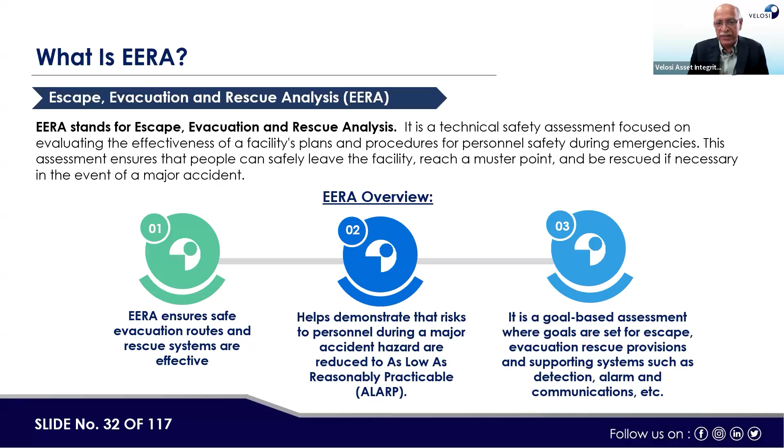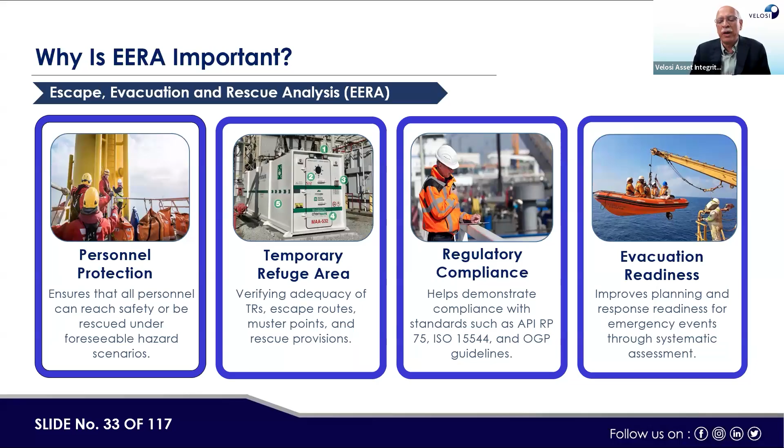Then it is also a regulatory requirement; we have to have a safe EERA situation. And there are standards like international standards, OGP standards, API standards, and companies' own standards. Then one part which is very important is evacuation readiness. You can see that if there is, let's say, a fire or some emergency on any offshore platform, there are escape boats where people can sit and be moved away from the platforms.

Now, if we see how the requirement of EERA evolved over the years, there was one major accident in the North Sea in 1988. There were many factors which contributed to this accident, but we are trying to highlight the factors related to EERA. We are not discussing all the causes of this accident because there were multiple causes. But the contributing factors related to EERA: one was inadequate rescue readiness and delayed external rescue operation. This was one of the causes.

The second one, the limited and poorly maintained escape routes resulted in many casualties. Then the third one was communication breakdowns between the different teams and shifts, which contributed to the escalation. So these were 3 reasons which contributed heavily to the increasing number of fatalities. So for EERA, especially from a communication point of view, or accessible routes during emergency, and if external involvement was required, it should have been done in a timely manner.

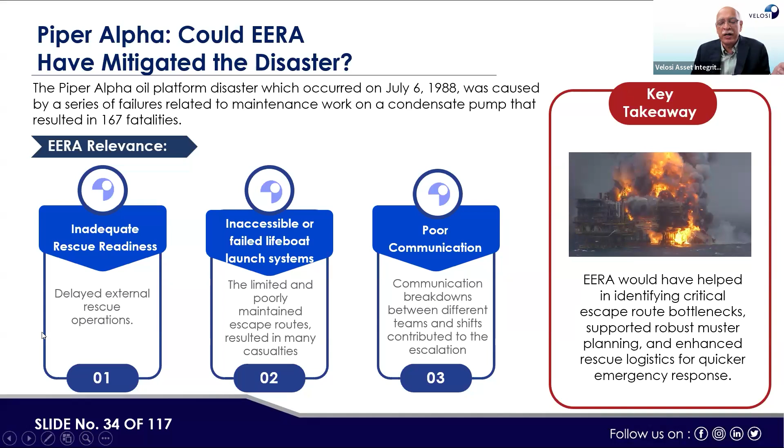There is another incident, the Kielland disaster, which happened on March 27, 1980. The Alexander L. Kielland accommodation platform capsized in the North Sea due to a structural failure, resulting in 123 fatalities. The causes of the incident were various, but the increased number of fatalities was also contributed by inadequate rescue readiness, lifeboat launch failure, and escape route inaccessibility. So these 3 reasons were also contributing towards the 123 fatalities in the North Sea.

If we go to another one, the 2010 Tesoro Anacortes refinery disaster. Here, there were 7 fatalities, which were caused by no defined escape routes, delayed rescue, and insufficient muster and refuge areas. So here, you can see the role of EERA becoming more and more important when we see the number of casualties which could occur due to any major accident.

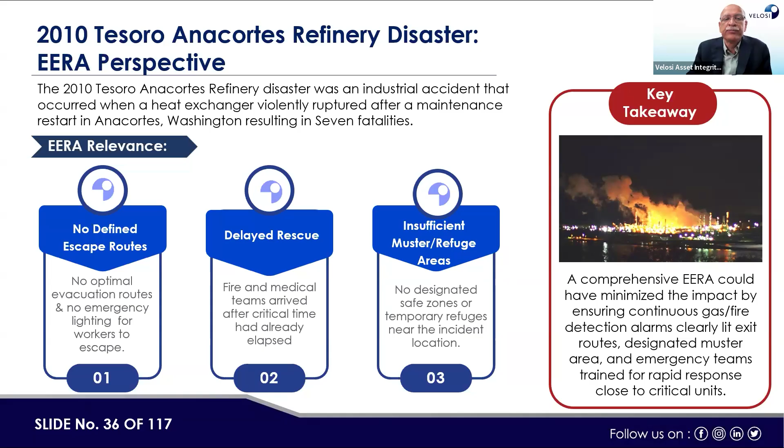So just to check our readiness, because all of you are attending this meeting and some might be getting bored with a lot of technical discussion, let's check ourselves: what is the primary objective of EERA? You can answer this question in the chat box, and then I will also show the answer. To test the response time of rescue helicopters, to monitor regular worker movement patterns, to assess the functionality of escape and rescue systems during emergencies, or to reduce the training time.

So what is the answer? Please write in the question and answer window. Some people are writing. At least I found one wrong, mostly right. So the answer is C, to assess the functionality of escape and rescue systems during emergencies.

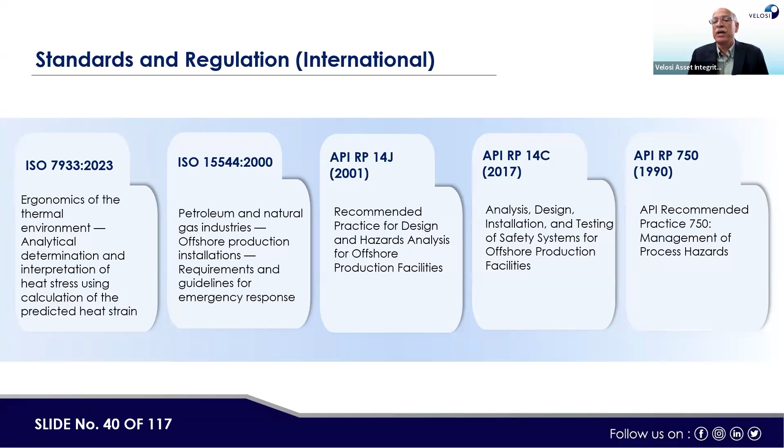One is ISO 7933, ISO 15544, API RP 14J, API RP 14C, API RP 750. If we go to the standards, this is the ergonomics of the thermal environment, analytical determination and interpretation of heat stress, calculation of the predicted heat strain.

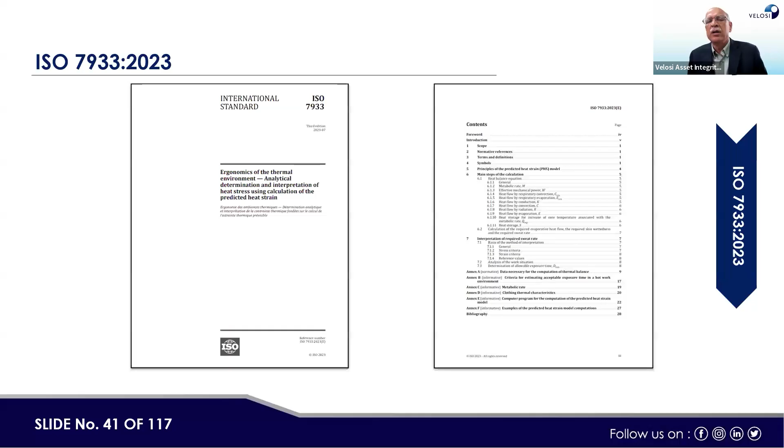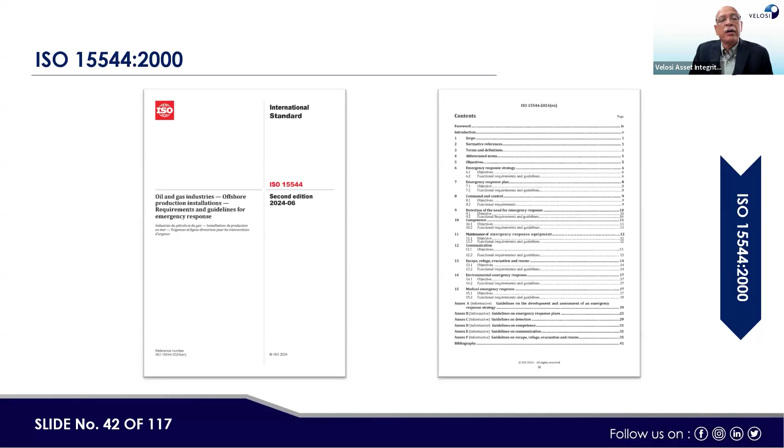This is one aspect. And the other one is a little more relevant: oil and gas industry, offshore production installations, requirements and guidelines for emergency response. This should be the first standard as a reference. Then there is a recommended practice for design and hazard analysis of offshore production facilities. This is another standard.

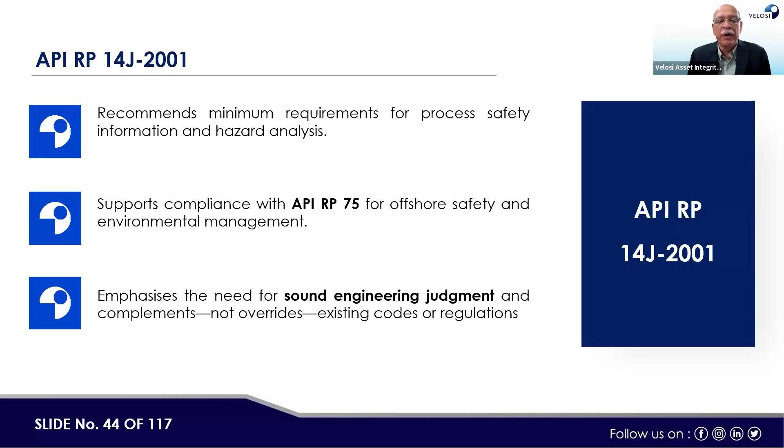The requirements covered under API 14J, if I may say, recommend minimum requirements for process safety information and hazard analysis, support compliance with API RP 75 for offshore safety and environmental management, emphasize the need for sound engineering judgment, and complement, not override, existing codes and regulations.

Next standard, API 14C, is the analysis, design, installation, and testing of safety systems for offshore production facilities. It forms the foundation of functional safety design for offshore facilities, outlines procedures for design, installation, and testing of both process safety and non-marine emergency support systems, ESS, on offshore production platforms, and coordinates with API 17V for subsea systems.

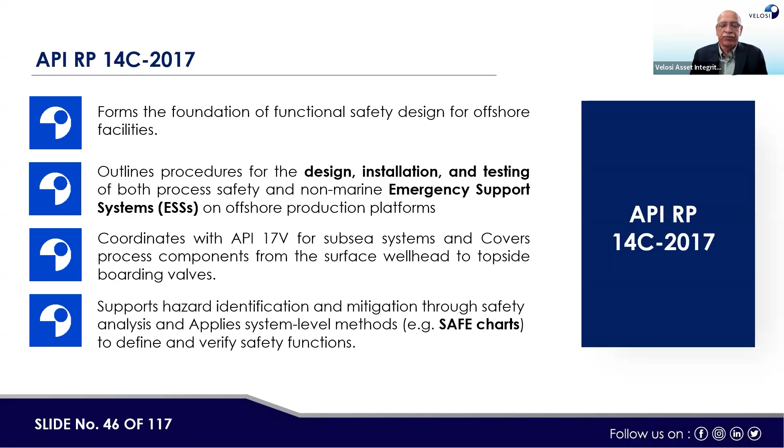It covers process components from the surface wellhead to topside boarding valves. Then it supports hazard identification and mitigation through safety analysis and applies system-level methods. Next standard, API 750, is the management of process hazards.

So there is ADNOC, a full set of standards, which we take as guidance and as basic rules. In ADNOC, for all facilities, it is a mandatory requirement for all new projects that the full set of HSE-IA related studies is produced. It has to be approved by the ADNOC regulatory system, which is the headquarters of ADNOC.

It is one of the exemplary systems in the region, from what we see, because we don't find this kind of robust system being used either by Saudi Aramco or Qatar Petroleum or other operating organizations in the area. But now we see that a lot of lessons learned from ADNOC are being adopted by the other organizations. So we feel very obliged to be working with ADNOC on these standards.

So HSE-RM-ST07 is the ERA-related standard. Then HSE-RM-ST06 is related to COMAH, which is the controlling standard. Then HSE-RM-ST03 is related to OHID. ST09 is related to FERA. And ST10 is related to the QRA requirement. It is a whole set of standards, and these are only the main standards we are trying to show here.

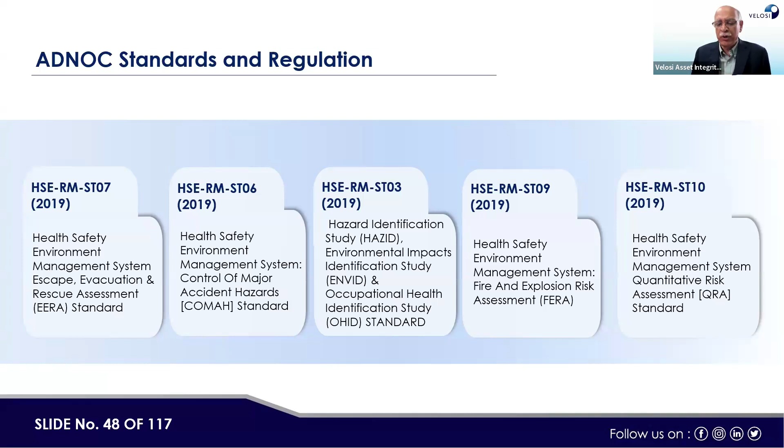This is the escape, evacuation and rescue assessment, EERA standard. It defines all requirements, all steps, workshop requirements, evaluation and a goal-based approach. Then the governing standard is COMAH, control of major accident hazards. It defines all the requirements from hazard workshop to bow tie workshop, then QRA, FERA, BRA, and then this study.

Then there is the hazard workshop standard, which covers HAZID, ENVID, and OHID. It defines the requirements of the various workshops, what the objective should be, and the worksheets of the workshops. FERA, just like QRA and BRA, is one of three quantitative risk assessment studies. This is the fire and explosion risk assessment study, and ST09 is the reference code. Then QRA, similar to FERA, but focused on quantitative risk assessment.

So now we move towards the ERA case study, because today our slides are not many. We will have a question and answer session at the end of the case study.

The project we are presenting involved HAZID, ENVID, OHID workshops and reports, bow tie workshop and reports, HSECES register and performance standards, update of the integrated QRA, fire and explosion risk assessment, FERA, emergency system survivability assessment, ESSA, escape, evacuation and rescue assessment, EERA, toxic gas dispersion modeling, COMAH report, review of the existing company HSEMS, EIA report including PPC, OHRA, and the HSEIA dossier. So you can see that ERA is part of this deliverable.

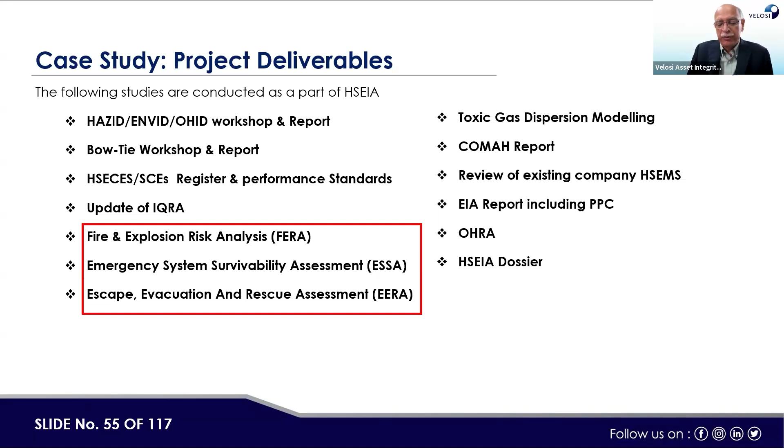Now, if we try to see as a part of the normal HSEIA protocol, which is adopted by ADNOC, here data collection, then we have OHID, ENVID, HAZID workshop, HSEIA workshop and reports. Then there is a hazard classification, non-MAH and MAH.

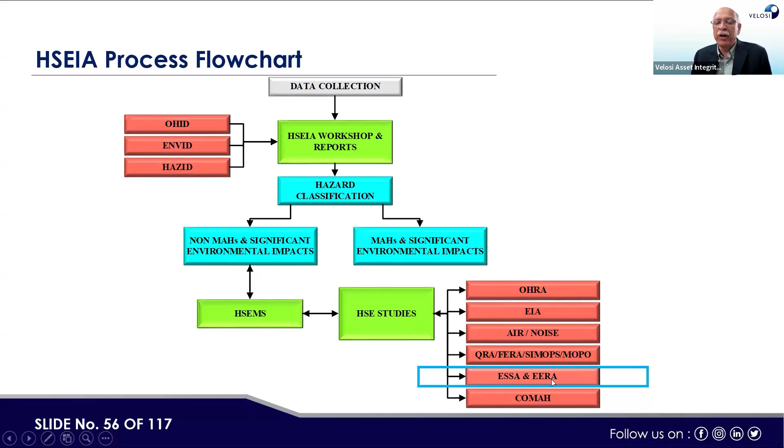Whereas non-MAH we cover through HSE-MS, and for MAH there are further set of studies which are required to be executed, including OHRA, EIA, air noise modeling, QRA, FERA, SIMOP and MOPO, ESSA and EERA, and COMAH report and HSEIA complete dossier.

So these reports also cover, if you say major accidental hazard, same detail is further provided, like QRA study report, FERA study report, ESSA study report, ERA study report, H2S zoning, along with that HSECES register at FEED stage, detail engineering stage, operation phase, and then HSE critical activity register, and then ALARP demonstration also there, risk reduction measures, cost benefit analysis, and emergency and facility response plan, which is practically correlated with ERA.

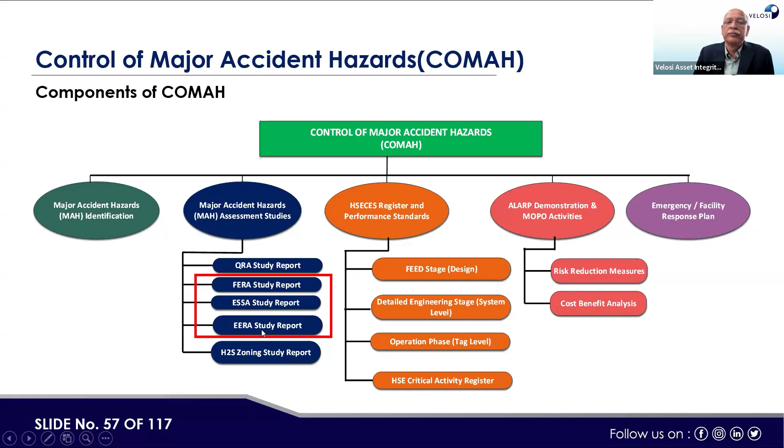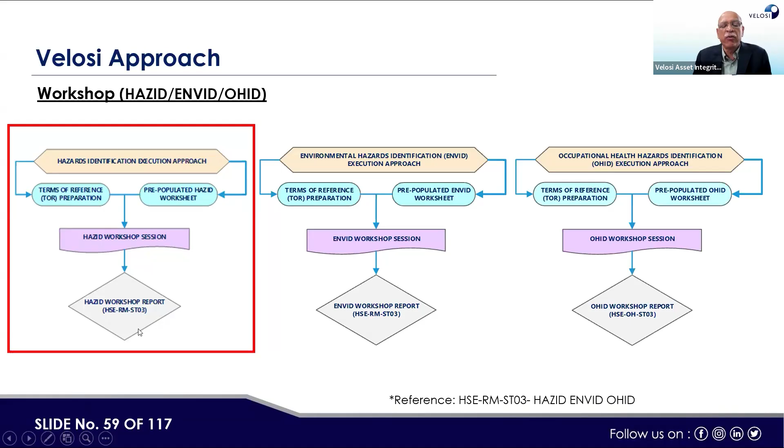Our approach, we first carry out the ERA; we don't do it as one of the parts. It can be done even, but we try to cover from A to Z aspects. First, there are 3 workshops like HAZID, ENVID, and OHID. Under HAZID, we covered hazards identification, and then terms of references are issued, workshop is executed, and then under workshop sessions, we try to identify the hazards in accordance with ST03 standard.

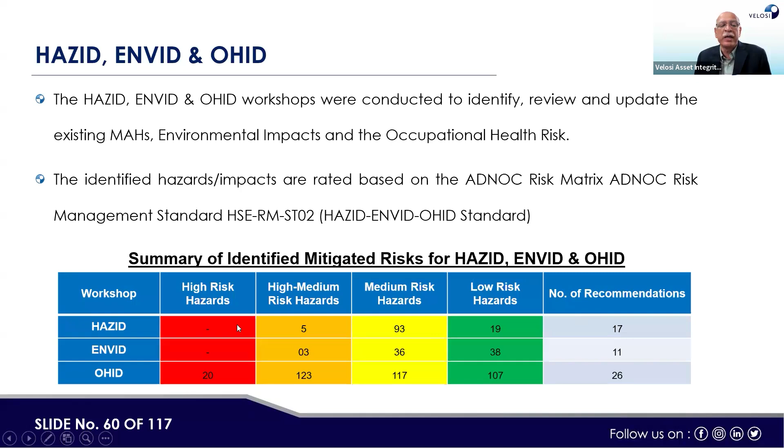In this particular project, we have identified various kinds of hazards, like high risk hazards under HAZID none, but OHID 20, and high and medium risk hazards under HAZID 5, under ENVID 03, OHID 123, medium risk hazards like 93 under HAZID, and under ENVID 36, OHID 117. Then low risk hazards are also there, and number of recommendations, sorry, 17, 11, and 26 against HAZID were 17.

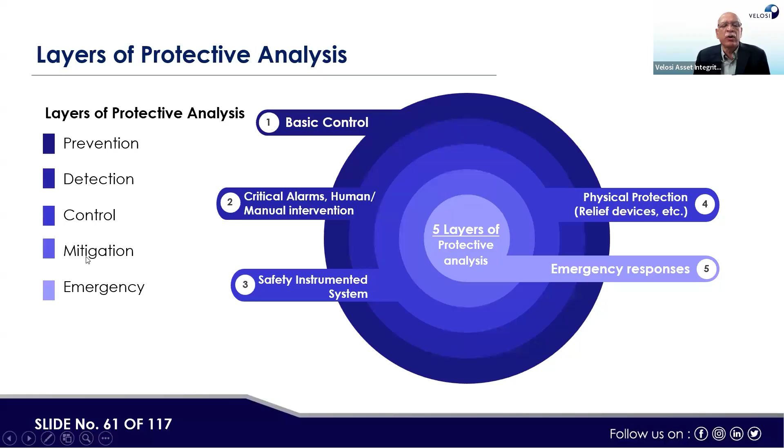Now, when we try to go bow tie, in general, we try to cover 5 layers of protection. Now, as per the ADNOC HSE-RM-ST07, there are 8 basically layers of protection. They are further subdivided, but these are like prevention, detection, control, mitigation, and emergency response, right? These are the 5 layers of protection. And then these 5 layers of protection we try to cover under bow tie.

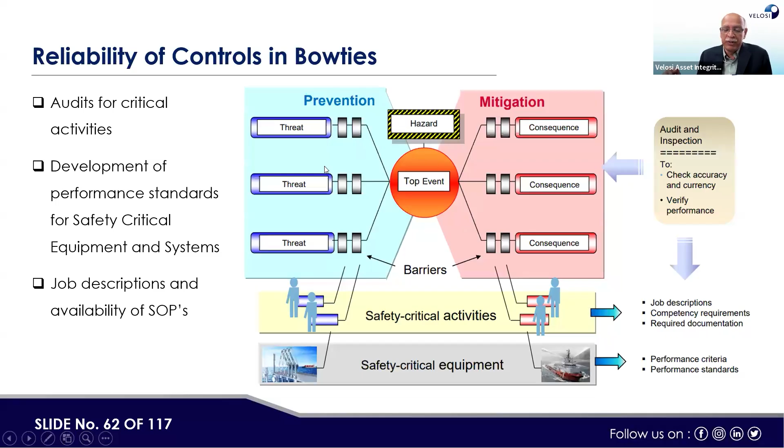Consequences are mitigated by, let's say, fire and gas detection system, passive fire protection system, or other mitigation measures, whereas threats are controlled by better design and by having better inspection, maintenance, and other activities. So here, if we see there are threats, various controls, and top event consequences and various mitigative controls, those are shown in a basically graphical way in the bow tie.

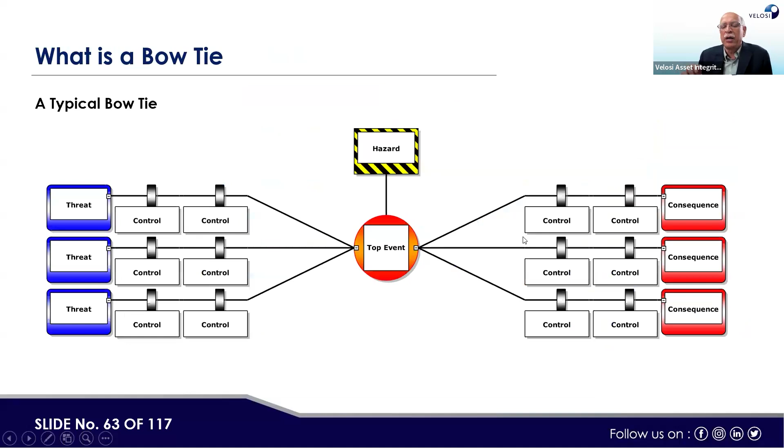So in the bow tie analysis, we try to show a threat like incorrect design, then design as per DGS or AGSs of ADNOC, then design review by PMC, PMT or ADNOC or third parties, then malfunction of the burner management system, which should be managed by inspection and maintenance. So there is a threat, along with what corrective action should be there. Similarly, if there are consequences, then how consequences are being mitigated, like a facility response plan, regular mock drill, and to be ready in case an emergency occurs.

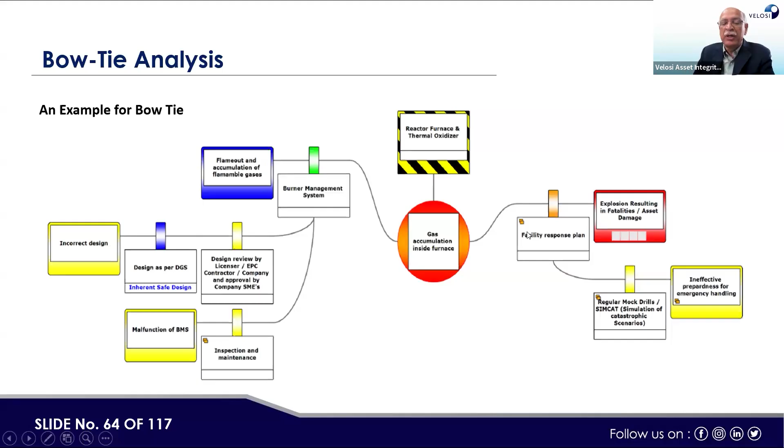So next, all those previous layers of protection are defined into 8 now: structural integrity, process containment, ignition control, detection system, then protection system, then shutdown system, emergency response, life saving. So these are the 8 basically layers of protection, and further there are HSECES barriers or SCE barriers, and then SCE categories. These are total 74.

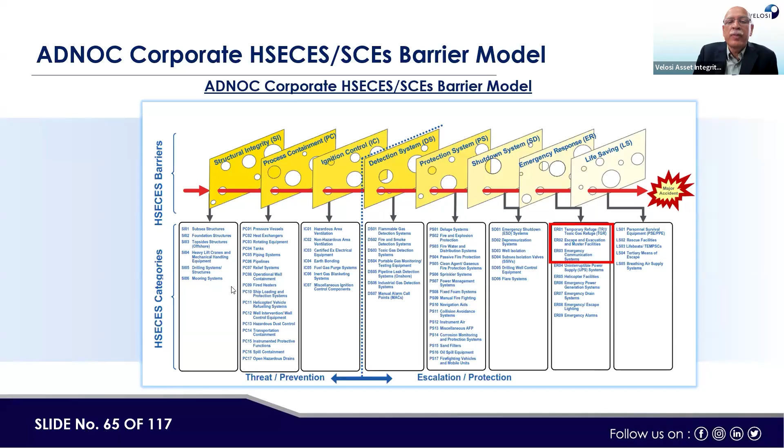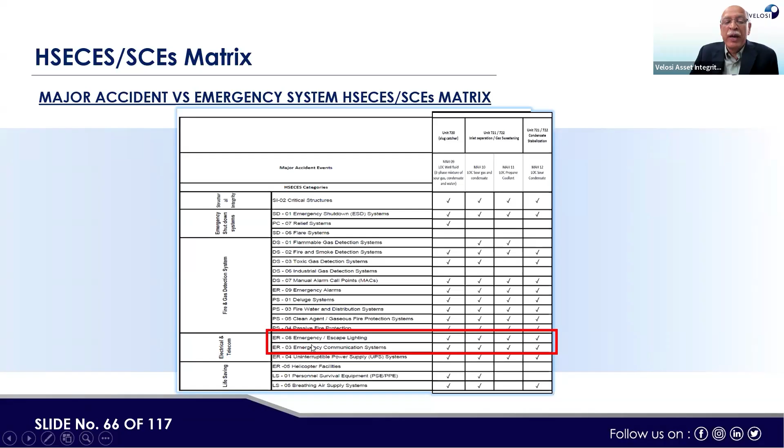And same, if we try to see the various MAH, then MAH are further subdivided into SCEs. So ER08, if you see, is emergency and escape lighting, and ER03 is emergency communication system. 2 HSECES are brought into the ERA part, which are part of HSECES barrier identification. So now how we categorize those barriers, like a barrier belonging to prevention, detection, control, or mitigation, or as per the new foundation, process containment or detection system here.

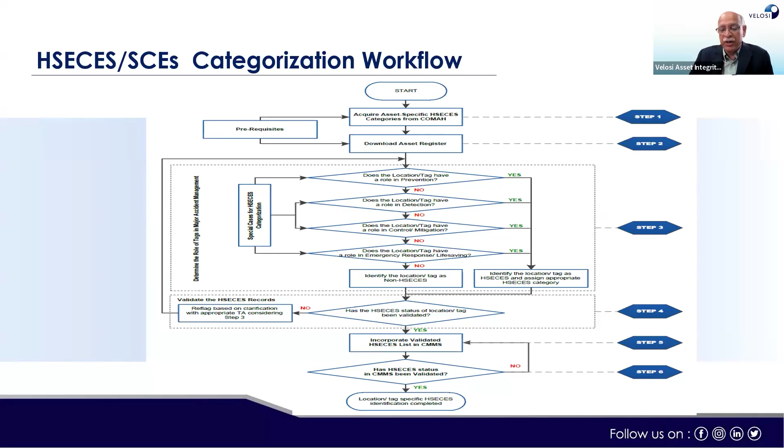Now, let's refresh our memory on how FERA is done. After FERA, we go to the first hazard workshop, then identification of bow tie-wise major accidental hazards and non-major accidental hazards. Then the FERA methodology and assumption register is prepared.

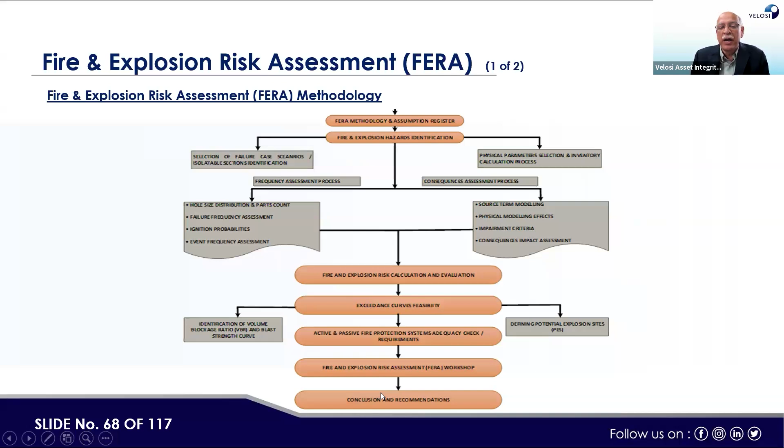Fire and explosion hazard identification is done. Then fire and explosion calculations and evaluation are done using software like PHAST and SAFETI. Then exceedance curves feasibility check. Then active and passive fire protection systems are evaluated. Then fire and explosion risk assessment is done, and conclusions and recommendations are made as per the FERA study.

Under FERA, we cover fire and explosion hazard identification, failure case scenario selection, isolatable sections, consequence assessment, frequency analysis, fire and explosion risk analysis, exceedance curves feasibility, active and passive fire protection adequacy check requirements, and fire and explosion risk assessment. The FERA workshop is done at the last stage before the report is issued.

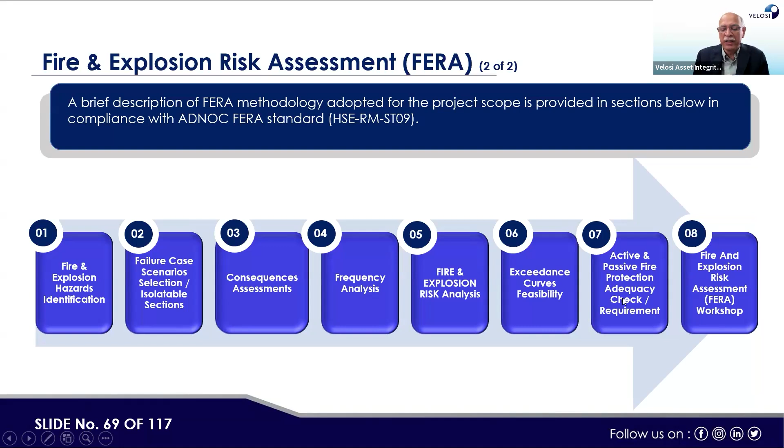Then we go to the COMAH report. COMAH is control of major accidental hazards. It is also a live document which is updated at the EPC stage, at operation stage, and post-operation stage. Here, major accidental hazard identification is done using formal hazard identification and bow tie analysis.

In the particular project we worked on, 41 MAH were identified and 12 new MAH from the current HSE-IA update, with others retained from the previous HSE-IA. Then a qualitative bow tie method was used to identify controls to prevent threat escalation and mitigate consequences. 9 new bow ties were developed, reflecting field modifications, management of change, reviews, and incident register as part of the HSE-IA update. So this is the report.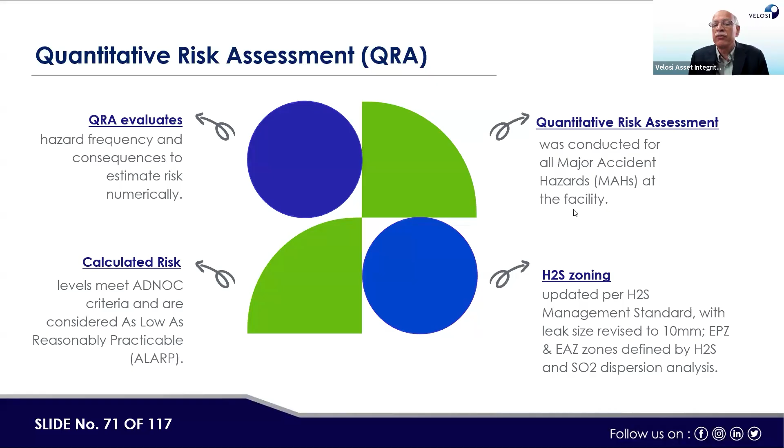So we are referring to what we have done at the operation phase. Now, under QRA, we evaluate hazard frequency and consequences to estimate risk numerically, calculate levels to meet ADNOC criteria, and ensure they are considered as low as reasonably practicable. A quantitative assessment was conducted for all major accidental hazards at the facility. Then H2S zoning is also performed.

Then ESSA, which is Emergency System Survivability Assessment. We conducted a webinar on this a few weeks ago. Under this, what we try to do, I'm just refreshing, is identify HSECES/SCEs that support emergency response for the facility. Then next was to assess vulnerability of HSECES/SCEs and their components against identified major accidental hazards, MAH.

Determine whether vulnerable systems are inherently fail-safe. For example, if anything goes wrong, would the ESD valve be able to close and the BD valve be able to open, and are control valve fail-safe positions known to the operators and the system. Then check for redundancy, measure where systems are vulnerable, not fail-safe, and lack redundancy, and we need to make recommendations accordingly.

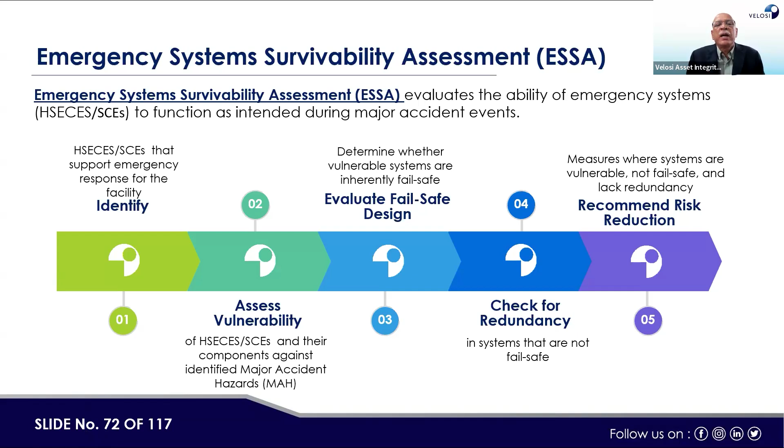Then, today's topic: escape, evacuation, rescue analysis. Here we initiate EERA with facility description and emergency escape and rescue measures, identify major accidental hazards, then endurance period calculation. Goal 1 is alarm and communication, goal 2 is escape, goal 3 is muster, goal 4 is temporary refuge, goal 5 is evacuation, and goal 6 is rescue.

We assess each goal-wise position, then see whether goals are achieved, and provide recommendations if goals are not being achieved. Then we conduct an emergency escape and rescue workshop, and the emergency escape and rescue analysis report and action plan is delivered.

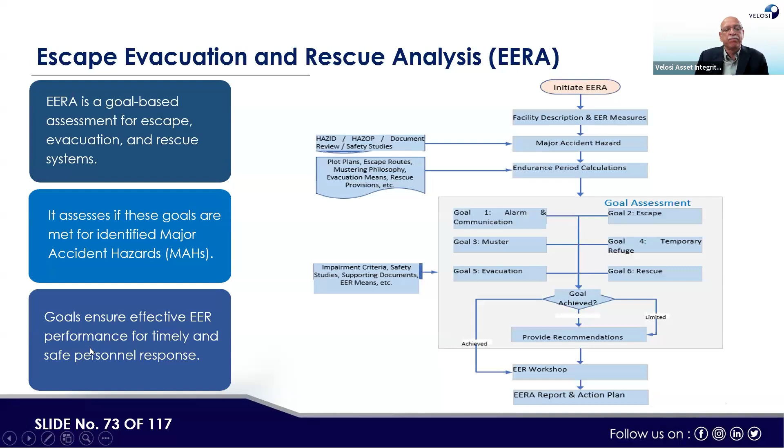So EERA is a goal-based assessment for escape, evacuation, and rescue systems. It assesses if these goals are met for identified major accidental hazards. Goals ensure effective EER performance for timely and safe personnel response.

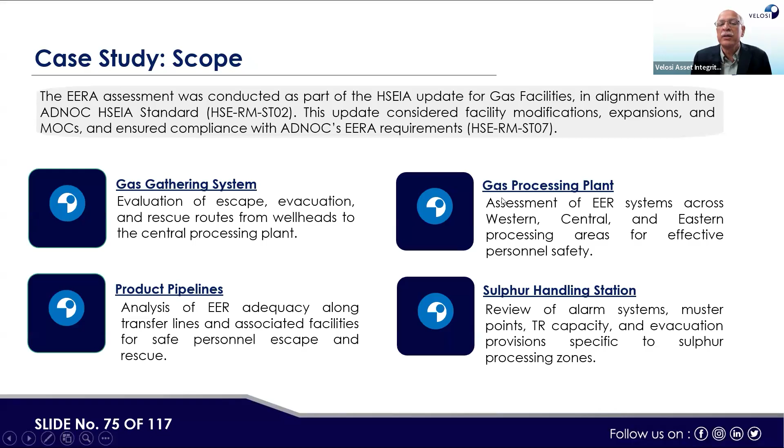Now, from a case study point of view, the EERA assessment was conducted as part of the HSE-IA update for the gas facilities, in alignment with the ADNOC HSE-IA standard. This update considered facility modifications, expansions, and changes, and ensured compliance with ADNOC EERA requirements as per HSE-RM-ST07. The facilities we covered were: gas gathering system, product pipelines, gas processing plant, and sulfur handling stations.

So EERA goals, which were defined, are: goal 1, alert and communications; goal 2, escape; goal 3, muster area; goal 4, temporary refuge; goal 5, evacuation; and goal 6, rescue.

For example, if I try to cover rescue, it means enabling the recovery of personnel using safe and immediate rescue methods, including standby medical support at safe locations, and accounting for all risk factors to rescuers and evacuees.

Similarly, if I try to cover escape, it means maintaining safe, passable, and well-lit escape paths from any location to the muster point or TR temporary refuge, considering injured personnel and alternate routes for impaired scenarios.

So similarly, I'm not reading all the goals, but there are 6 main goals and there is a target of what we need to assess. Then accordingly, the report and assessment is performed and a workshop is conducted.

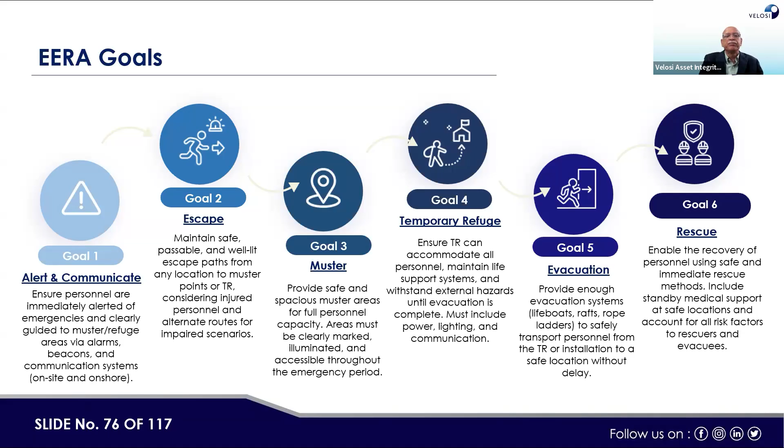Then escape route accessibility - whether during the emergency the escape route would not have been blocked. Then refuge and muster points - whether they are known to operators and the people in that particular area, and if they would be able to reach there.

Then if some injury occurs, whether we would be able to evacuate the injured person to the hospital or other safe location. This is part of the rescue and recovery system, which exists to recover and transport evacuees to a place of safety. So evacuation arrangements and rescue and recovery are correlated, but these are the objectives of the EERA study.

Now, what measures do we try to bring in? As per HSE-RM-ST07, there are 6 basic EER - escape, evacuation and rescue - measures. A facility response plan should be available.

Number 2, F&G mapping study should have been done, so F&G can detect if there is any leakage or any fire in the particular area.

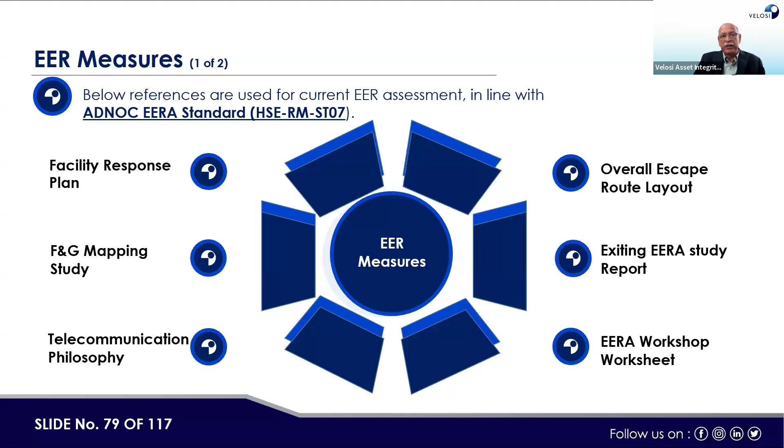So these are the measures which help us assess whether the 6 goals we set for the EERA study are being met by the operator or operating company or not.

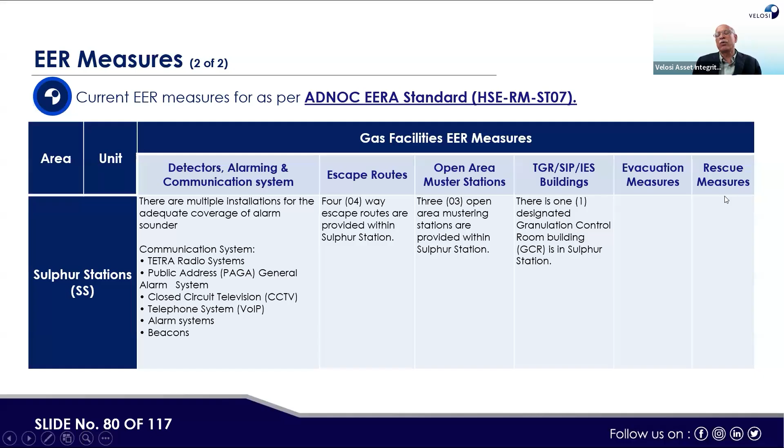Then escape routes - 4-way escape routes are provided within the sulfur station. Open area mustering stations are provided within the sulfur station. Then TGR, SIP, and IES buildings - there is one designated granulation control room building in the sulfur station. Evacuation measures and rescue measures were also in place as part of the assessment.

So here, the EERA study approach and key evaluations. Methodology: the EERA study follows ADNOC ST07 using a goal-based approach to assess the escape, evacuation, rescue system and supporting elements like alarm and communications.

Assessment: it evaluates the effectiveness and adequacy of systems such as detection, alarms, and communications in meeting safety goals under emergency conditions for identified major accidental hazards.

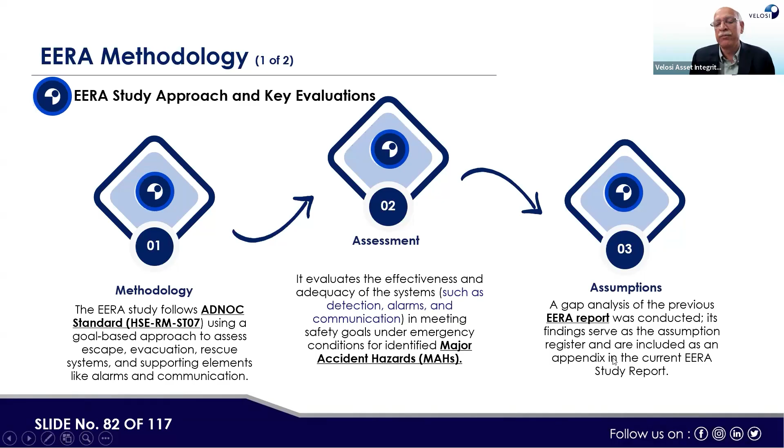Then assumptions: a gap analysis for the previous EERA report was conducted. Its findings serve as the assumption register and are included as an appendix in the current EERA report.

Here, approach point of view - same as I discussed earlier, this is a repetition. Initiate EERA, facility description, EER measures, MAH identification, endurance period calculations.

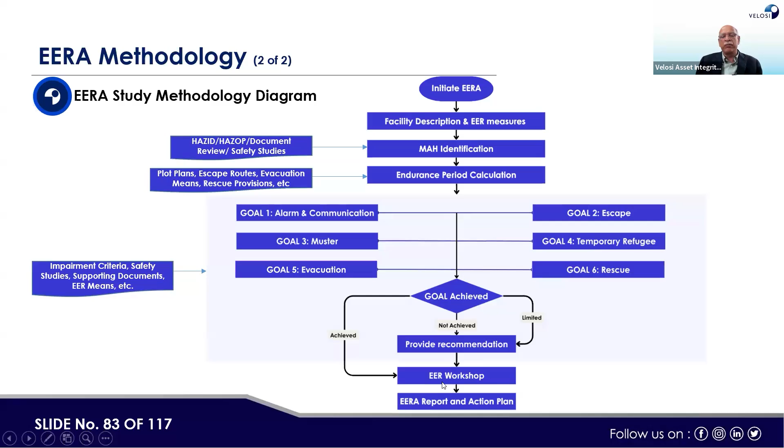Then there are goals: goal 1, alarm and communications; goal 2, escape; goal 3, muster; goal 4, temporary refuge; goal 5, evacuation; goal 6, rescue - goal achieved, or not achieved when recommendations are made. Then escape, evacuation and rescue workshop, then EERA report and action plan.

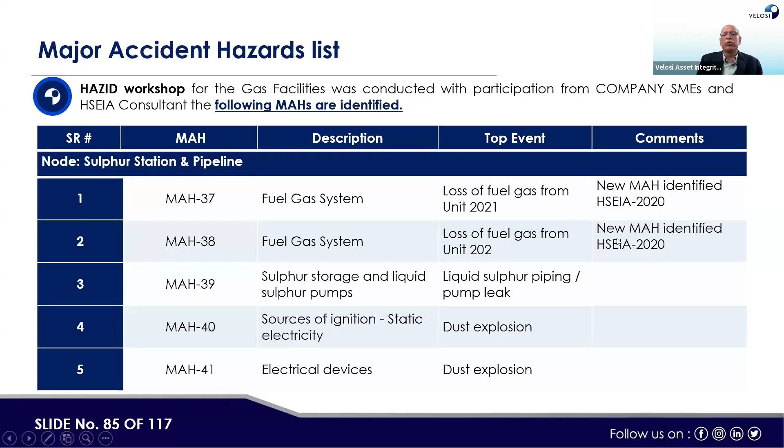The hazards identified for the sulfur unit were MAH-37, MAH-38, 39, 40, and 41: fuel gas area issues like loss of fuel gas from unit 2021, loss of fuel gas from unit 202, liquid sulfur piping pump leak, dust explosion, and new MAH identified as HSEIA as per 2020. Tags and other identifications have changed, so these are not reflecting the actual situation.

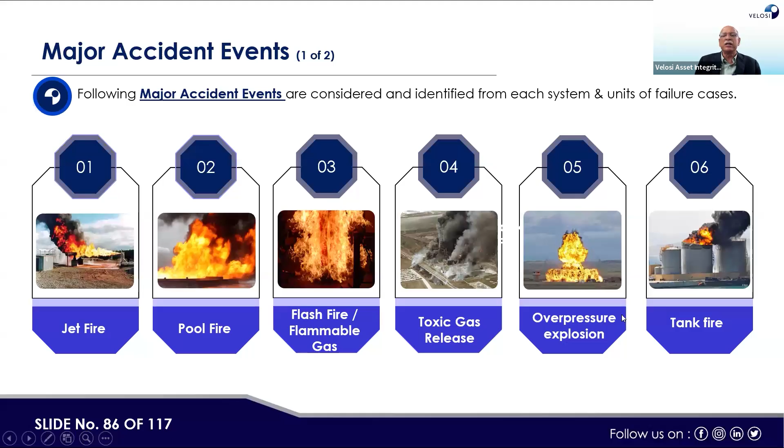What major accident events are considered here? Jet fire, pool fire, flash fire with flammable gas, toxic gas release, overpressure explosion, and tank fire. These are the six major accidental events which may occur in the facilities, and against each we identify the major accidental hazard.

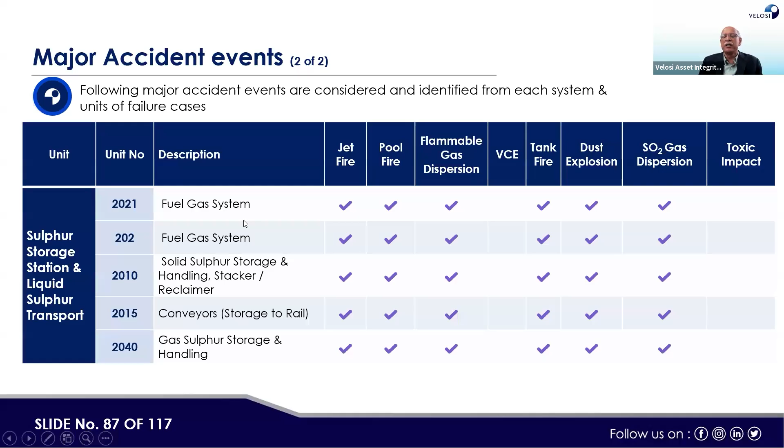What kind of scenarios are there? For the fuel gas system, there is jet fire, pool fire, flammable gas dispersion - vapor cloud explosion is not considered - tank fire, dust explosion, and SO2 gas dispersion. These various fire and gas scenarios are considered applicable to this particular facility.

From a major accidental assessment point of view, what is the criteria of impairment? Escape routes should not be exposed to greater than 6.3 kilowatts per meter square. From an explosion point of view, the overpressure should not exceed 0.2 barg. Toxic gas release should not be greater than 100 ppm. For flash fire, the LFL limit should be followed. SO2 dispersion is also 100 ppm IDLH.

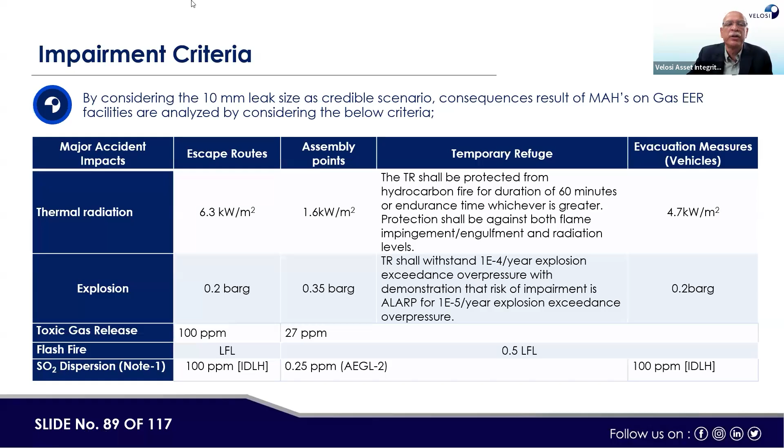Evacuation measures also have targets, and temporary refuge requirements are given. The TR shall be protected from hydrocarbon fire for a duration of 60 minutes or endurance time, whichever is greater. Protection shall be against both flame impingement and engulfment, and radiation levels. These are the criteria defined as per ADNOC standards.

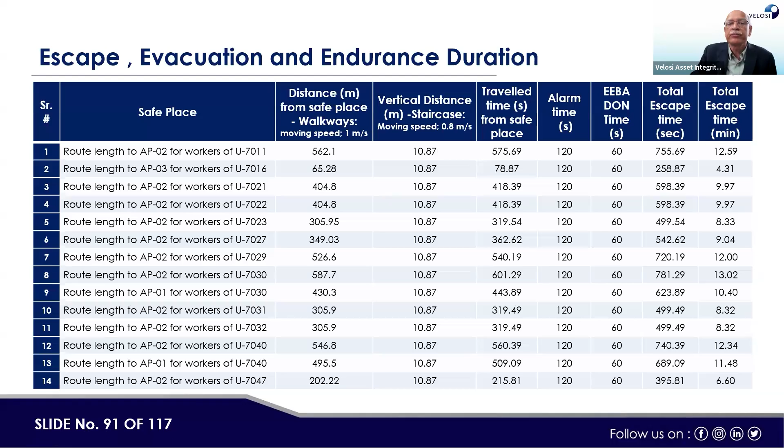Sulfur station - this is a GCR building - has the same total escape time.

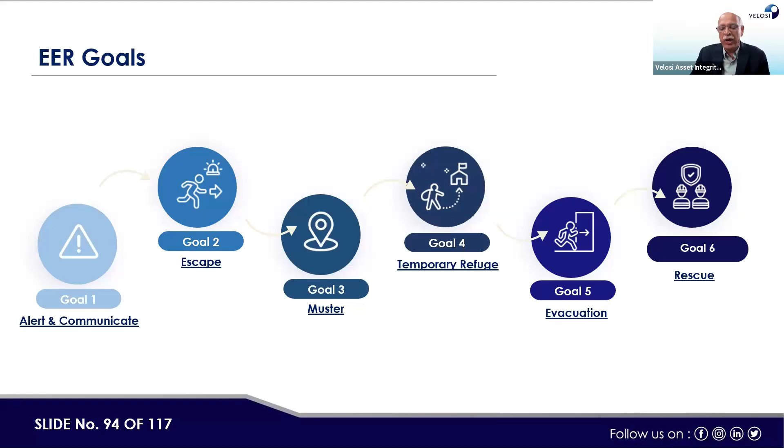Now, from a goal assessment point of view, there are 6 goals, which we have assessed one by one. Goal 1 is the alarm and communication objective: alert personnel of emergencies and maintain communication with emergency control centers.

F&G detection coverage was optimized by relocating and adjusting detector placement based on mapping studies, achieving near complete area coverage post optimization. The telecom system is designed for high reliability and availability. Key subsystems include Tetra radio, PAGA, CCTV, telephone systems, and beacon systems, which were all effective. Conclusion: Goal 1 is achieved - comprehensive and reliable alerting and communication instructions are in place.

Goal 2 is not in order here, so Goal 5, evacuation, is arranged based on the assessment. Goal 5 ensures all personnel can be evacuated safely during an emergency.

Evacuation vehicles, including standby units, are available as per the facility response plan. The emergency response team (ERT) ensures evacuation coordination. Injured persons are transported using dedicated ambulances to the on-site medical facility. Conclusion: Goal 5 is achieved - sufficient evacuation means are available for safe personnel relocation.

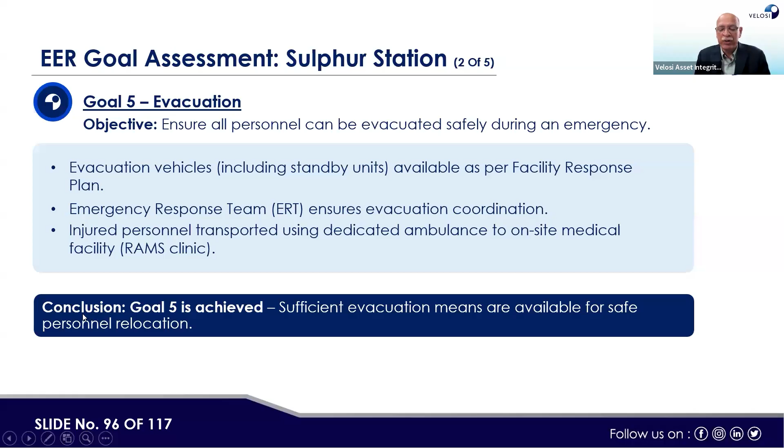Goal 6 is rescue personnel and rescue: rescue personnel and transfer them to a place of safety with medical support. A head count is conducted by the ERT dispatcher post evacuation, search and rescue operations are performed by the tactical response team, the on-site medic team provides first aid, and injured personnel are transferred to a medical clinic 14 kilometers away or an external hospital as needed. Conclusion: Goal 6 is achieved - rescue operations and medical facilities are well established and responsive.

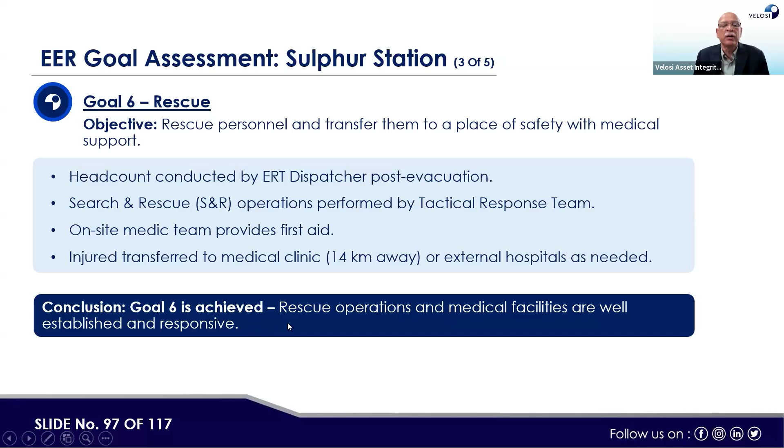Escape objective: enable safe and rapid movement from the hazard zone to a safe zone. Escape route assessment confirmed availability and safety under key scenarios. For jet and pool fire, there is no impairment to escape routes. For flash fire, maximum gas dispersion of 6.03 meters does not impact escape ways. For SO2 dispersion, while one route may be impaired, alternative routes remain available. For dust explosion, there is no impact on escape routes. Conclusion: Goal number 2 is achieved.

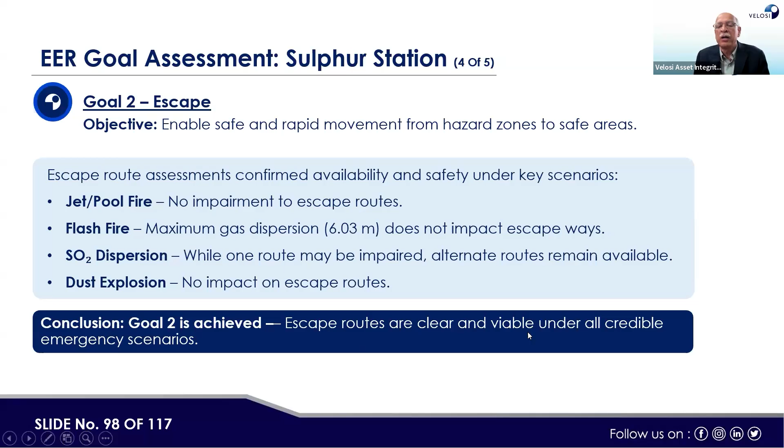Escape routes are clear and viable under all credible emergency scenarios.

Muster, goal number 3: provide safe muster areas for personnel during emergencies. SO2 dispersion modeling showed impairment to one muster point in specific wind conditions. Alternate assembly points are available and accessible. Assembly areas are sized for full personnel capacity and designed for protection during emergency operations. So goal 3 is achieved. Toxic H2S gas dispersion is not applicable here because it's an SO2 area.

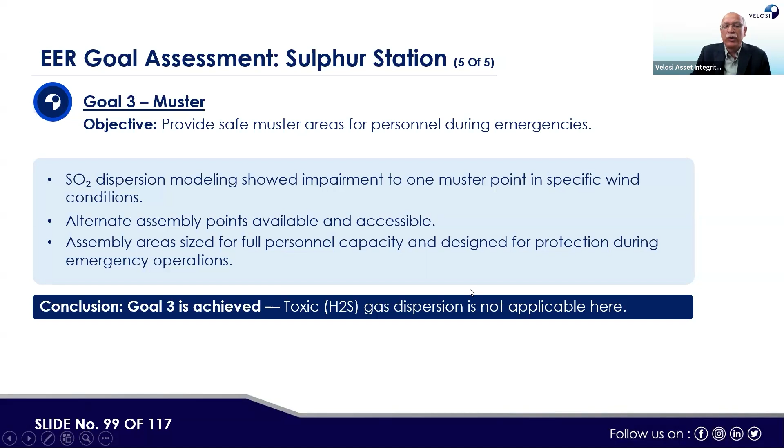So now, temporary refuge impairment assessment. Here we checked the distance of the granulation control room from the releasing source at the sulfur station, the sulfur storage tanks, the approximate distance from the releasing source to the GCR. The GCR building is not impacted by the MAH scenario at the sulfur station. Therefore, goal 4 is achieved. However, SO2 gas detectors should be installed at appropriate locations within the GCR building.

So here, the 4 scenarios: pool and jet fire, no impact from radiation or fire engulfment at GCR. Similarly, the maximum dispersion distance of 5.74 meters does not affect GCR. Dust explosion, no overpressure effect at GCR detected, no impairment observed. Then SO2 dispersion, the AEGL-2 level dispersion could reach GCR.

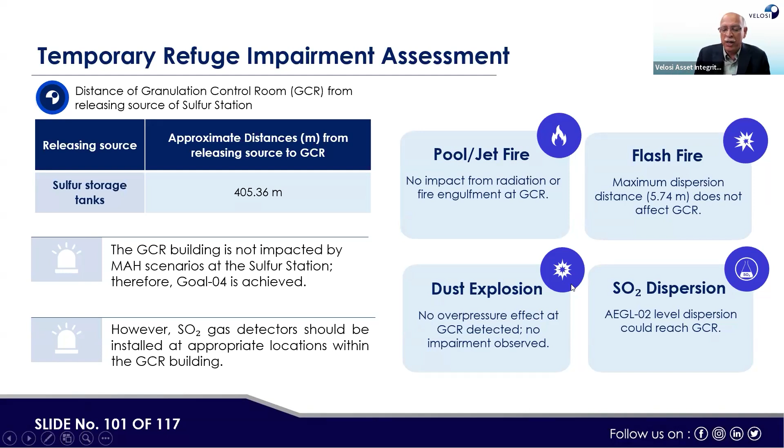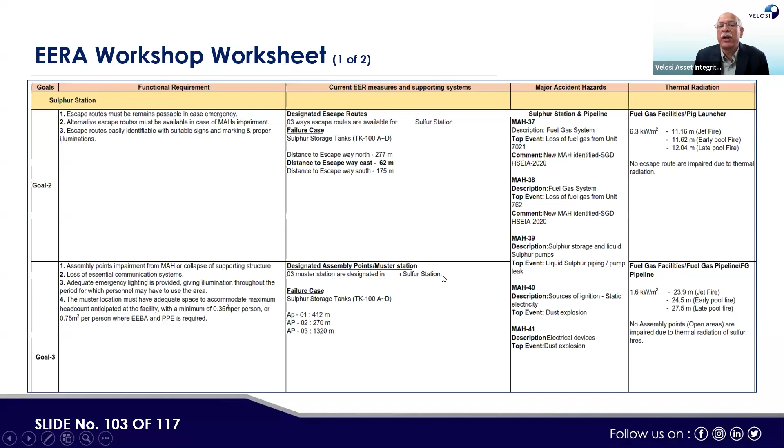Similarly, the next goal 3 is assembly points, which are checked and designated at the sulfur station. For the sulfur tanks, the distance is this much, and the 3 muster stations are designated in the sulfur station area. The next goals assess the granulator wet scrubber fuel gas facilities. Here the LFL limit is 6.034 meters. Then for the fuel gas facilities pig launcher, the LFL limit is 0.5.

So these are the distances. For thermal radiation and exposure, the flash fire, jet, pool fire and explosion events, all the escape routes are safe. A 100 ppm SO2 dispersion cloud is not generated in the software. Then the 100 ppm H2S gas dispersion event is not applicable, hence no further EER assessment was required. The goal is considered to be achieved here as well.

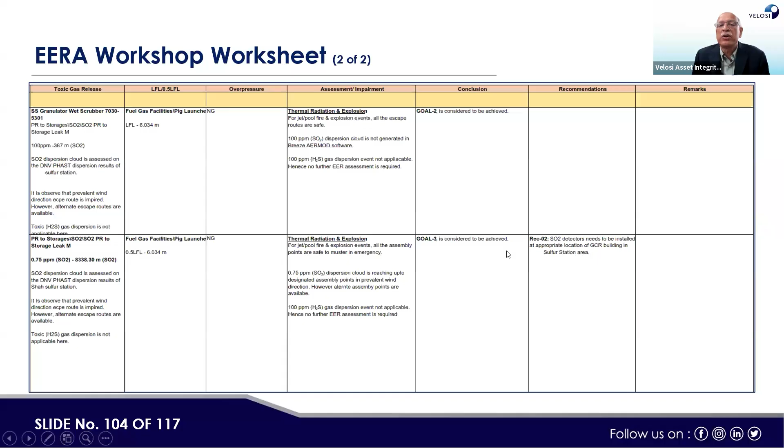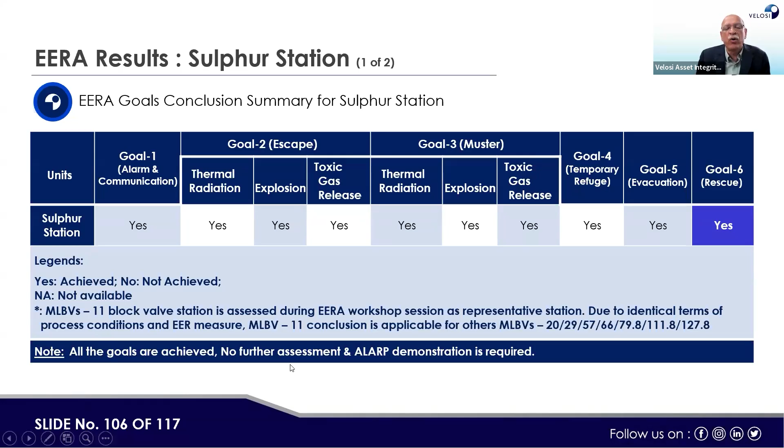Now, from a results point of view, for the sulfur station, goal 1, communication, achieved. Goal 2, thermal radiation, explosion and toxic gas, achieved. Muster, thermal radiation, explosion and toxic gas release, achieved. Then similarly, goal 4, temporary refuge, goal 5, evacuation, and goal 6, rescue, all considered achieved. So the conclusion is all goals are achieved and no further assessment or ALARP demonstration is required.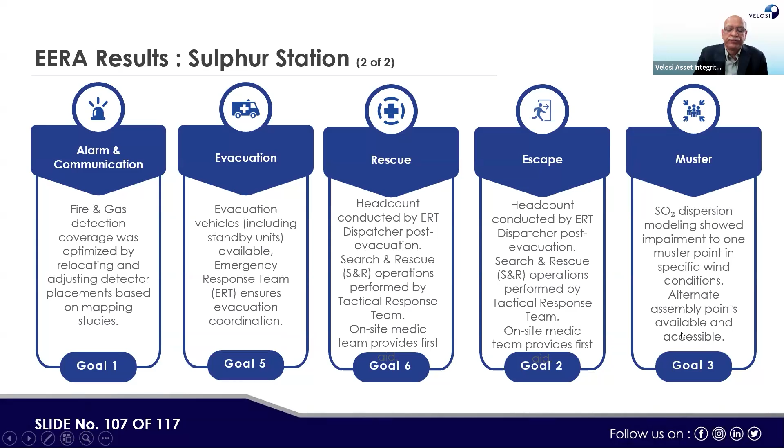Now, EERA recommendation: all goals were achieved. No ALARP demonstration is required. However, the following recommendations were recorded. The impairment assessment of thermal radiation and blast overpressure exceedance curves for the IES building needs to be further evaluated with respect to MAH identified in well-pad areas. SO2 detectors need to be installed at appropriate locations in the GCR building in the sulfur station area.

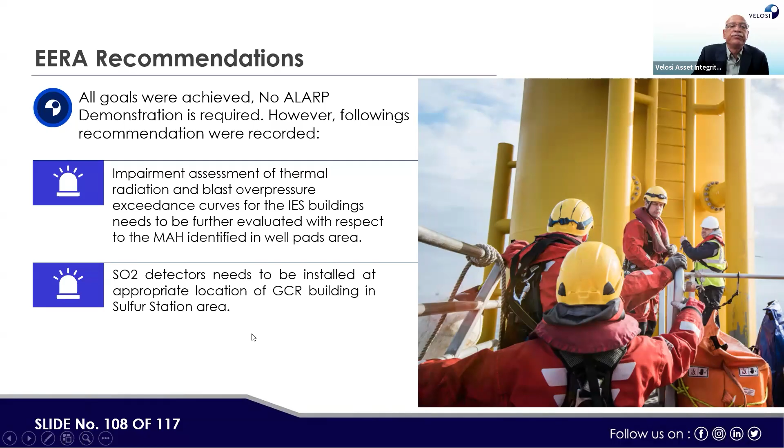So now, our webinar or presentation is over. Now, to assess what we have learned up to now, we have various questions and we go one by one. Please feel free to answer those questions in the question and answer window. After completion of these questions, we will also take live questions, and all of you are free to ask as many questions as you can, and we'll try to answer to the best of our capability.

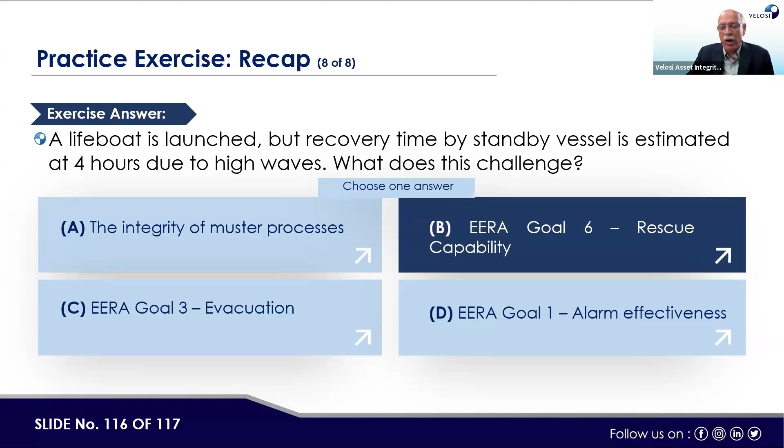So Mr. Charlie asked, could you provide a real-world example where a temporary refuge impairment assessment identified a critical design flaw or operational gap in an offshore installation emergency response plan? See, this question is hypothetical, right? If a TR is arranged for any facility, it means there should not be any toxic gas, heat or radiation impact on that particular container where people are. So these are designed properly and kept in an area where people are safe for a certain period.

But there could be a design flaw, for example, the air intake for ventilation purposes; if it is not taken from a proper safe location, then there could be an issue. Otherwise, mostly it works. Okay.

What is the standard for the assembly point, where should the assembly point be? So the ST07 standard, I think, is the standard for ERA. And the ADNOC standard does provide one goal for the muster point: where the muster point should be, what should be its size, what should be its distance, and whether it is in a safe location or not. So all these requirements for the muster point are given in the ST07 standard.